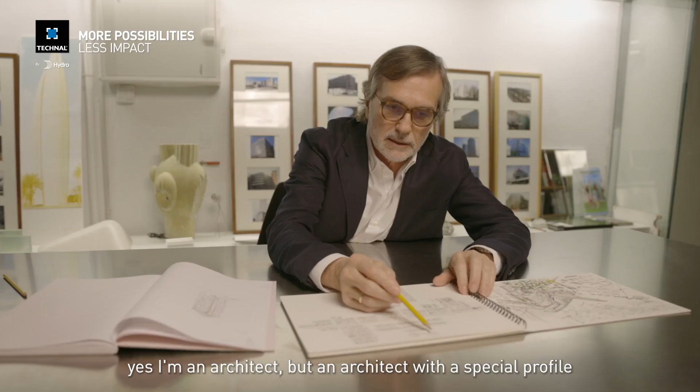First of all, I would like to introduce myself with a simple sentence. Yes, I'm an architect. But an architect with a special profile, because my team and I have developed more than 180 buildings over the last 30 years, making credible the ideas of others, sharing them by teaching in different universities, and especially drawing. We have a small and very dynamic office based in Barcelona, from where we offer facade consultancy for the best architects around the world, especially with Pritzker Prize.

Usually, architects imagine the result and the engineers create the process, or explaining it in another way, architects think what and engineers know how. So we, as facade consultants, move in an equidistant position between both, and our projects are developed with a simple philosophy. Technique and form are the same.

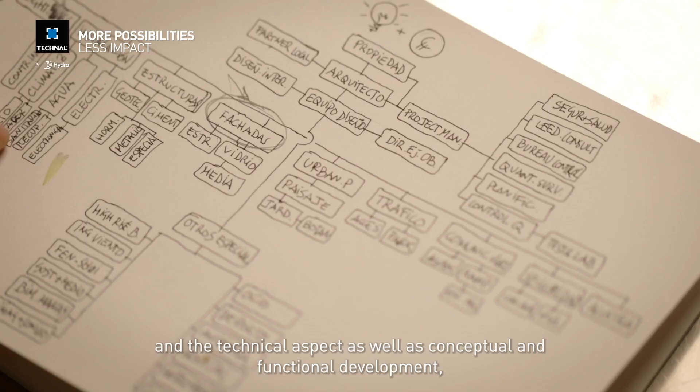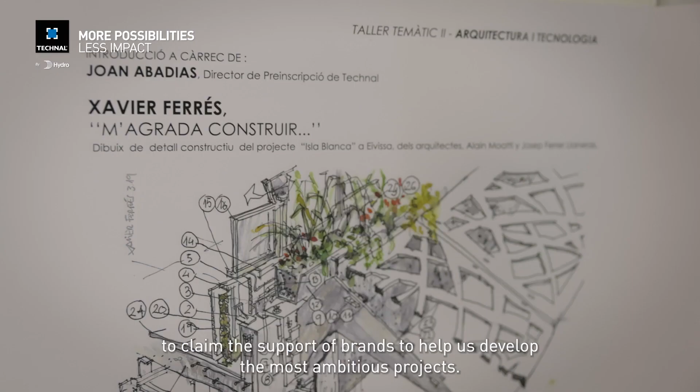Every day, more and more architecture studios focus their work on the level of definition of the facade, the technical aspect and the conceptual and functional development, leaving the detailing and the specific elements of the facade delegated to the technical specialists from the industry. So, the most common way to face the problem of the technology is to claim the support of brands that help us to develop the most ambitious projects. Our role as consultant, in addition to the above, is to think and advise from the strategic development.

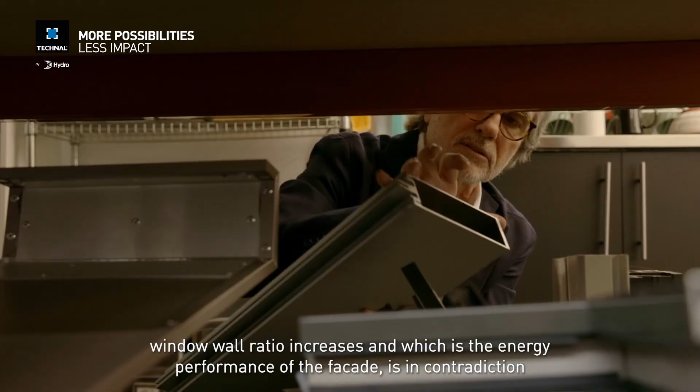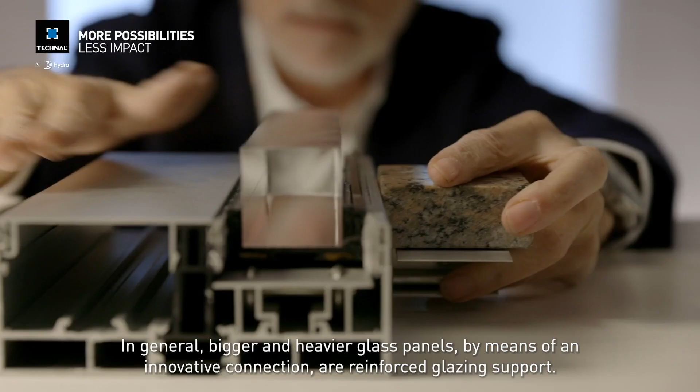The present leads us to consider energy as one of the engines of evolution, and this has been the case for decades. However, this contrasts with the need to work with large formats and glazed surfaces that make the so-called window-wall ratio increase, which is the energy performance of the facade, in contradiction with the dimension of the transparent areas of the buildings. On the other hand, this need to increase the sizes requires larger panel dimensions, engineered for bigger and heavier glass panels by means of innovative connections and reinforced glazing support.

Last year, we started with a jumbo glass of 3.2 by 6.2. Actually, we have, with different suppliers, glasses of 18 meters height by 3.4. So, obviously, we can use these sizes of glass.

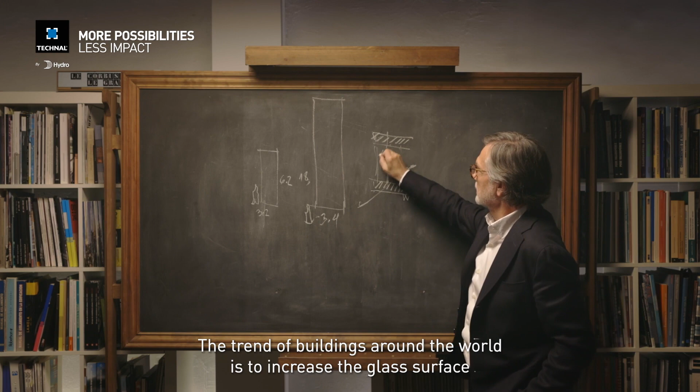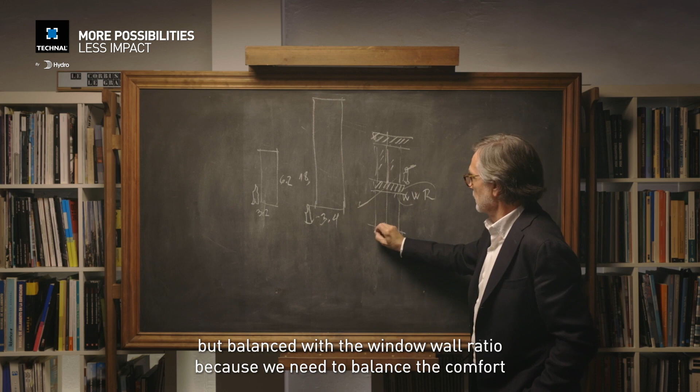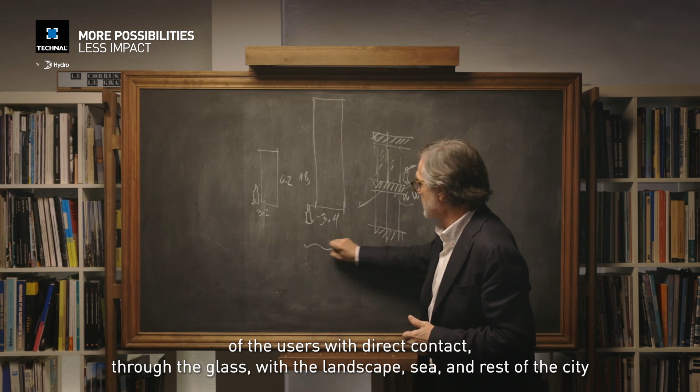The trend of the buildings around the world is to increase the glass surface, but balancing with the window-wall ratio, because we need to balance the comfort of the users, contacting directly across the glass with the landscape, the sea, the rest of the city, in order to respect the rules and regulations in terms of energy savings.

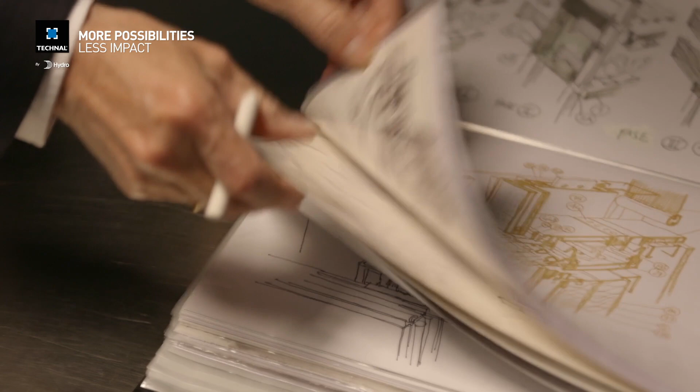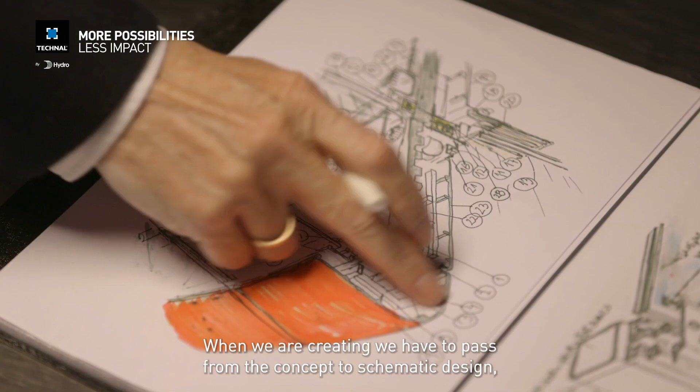The only way that I can explain my experience, my thought, my feeling about the technical decisions, the technical elements, is drawing. My brain is connected with my hand directly. When we are creating, we have to pass from the concept and schematic design development to construction documents, trying to be proactive with the architects, usually our clients, in order to achieve the maximal fidelity to the original idea.

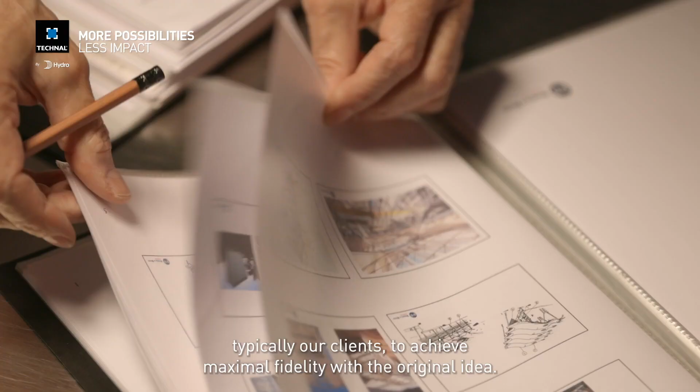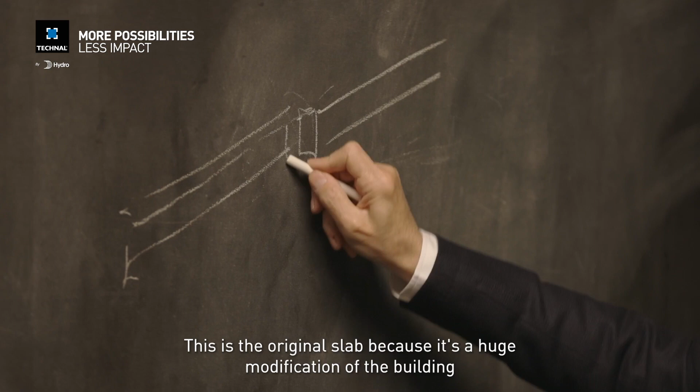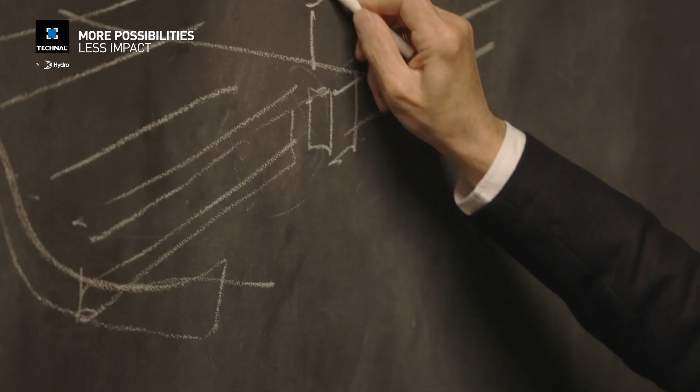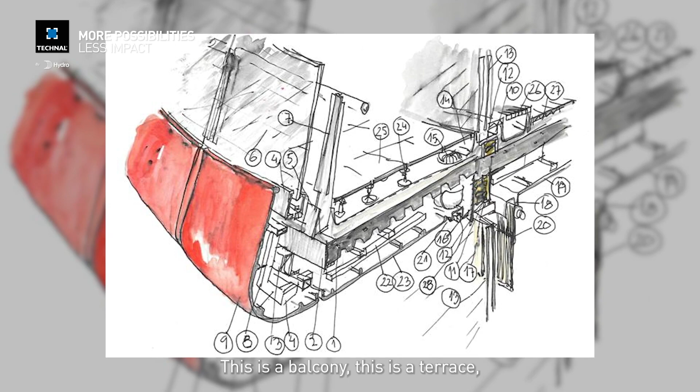For example, a building under construction in Barcelona, named Diagonal Zero Zero, a multi-story building. I think it's 27 levels with a special balcony. This is the original slab, because it's a huge modification of the building. This is the slab. This is the beam that we have to support. The level of the interior floor. This is the exterior floor, and we have a shape like this. This is a balcony, this is a terrace. The building is something like this.

It's more or less 110 meters, and all these balconies are here. And here, in the lateral facade, we have a typical curtain wall. It's a typical profile with spandrel and glass and windows, etc.

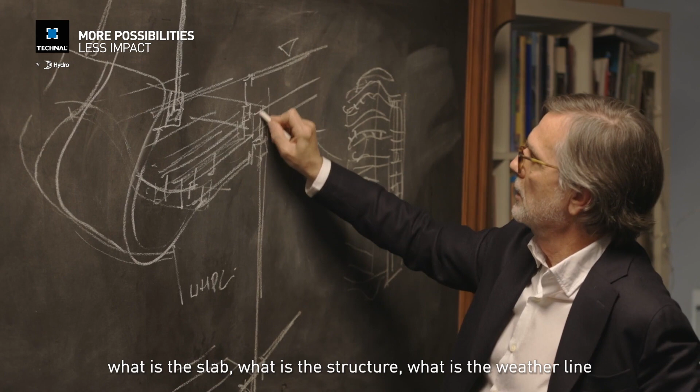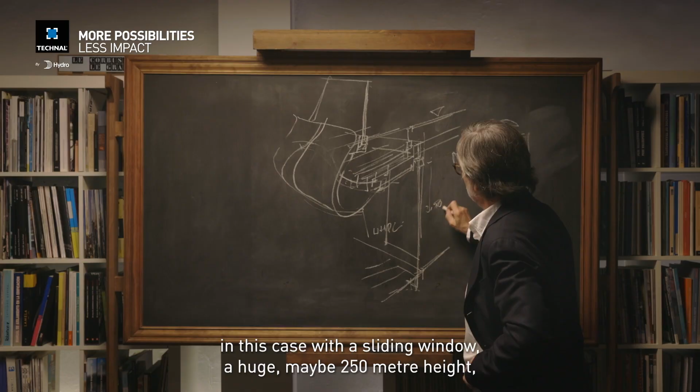The pass from here to here is very important to understand what happened. What is the slab? What is the structure? What is the weather line? In this case, with a sliding corridor, a sliding window, a huge, maybe 250 meter height, and this is a part, and we'd like to show this in color, but I think that it's clear in order to understand what happens when we have to develop from the concept to the detail.

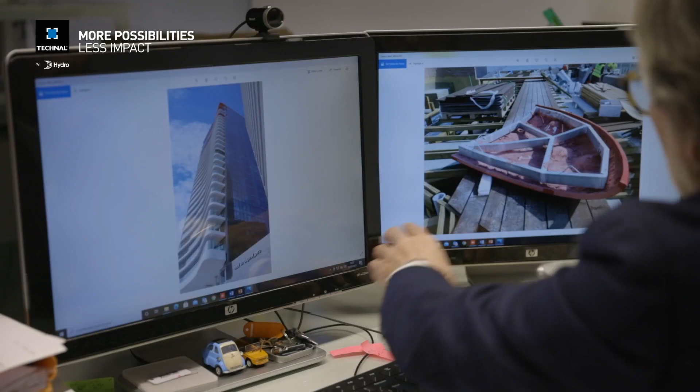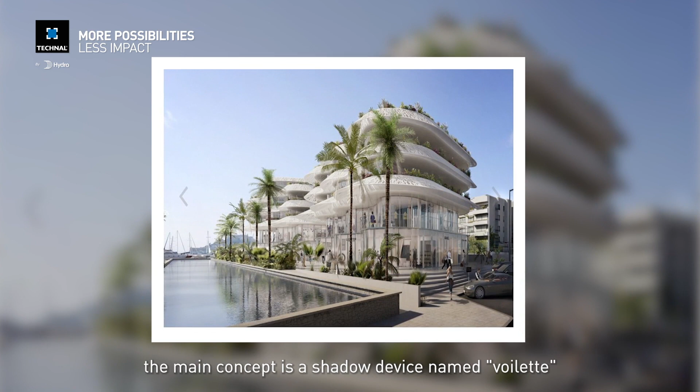The second case that I would like to share with you is a commercial and residential building in Ibiza, named Isla Blanca. The author is l'agence Moatti-Rivière de Paris. The project is led by Alain Moatti, and the local partner is Josep Ferrer Llaneras. The main concept is a shadow device named voilette in français. It's an element qui vole.

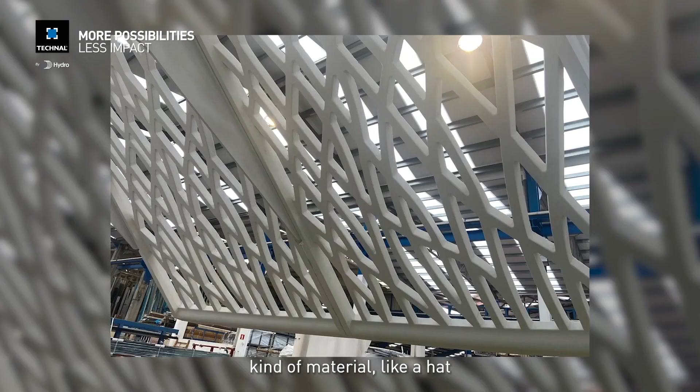So the building is double like this, maybe 80 meters of length from here to here. To use this kind of material like a hat that produces the shadow under the face of a woman on the beach. And this element is something like this. You have different molds because this is the main structure of the building, and here is hanged a huge element like this that supports these curves. So we have the structural element.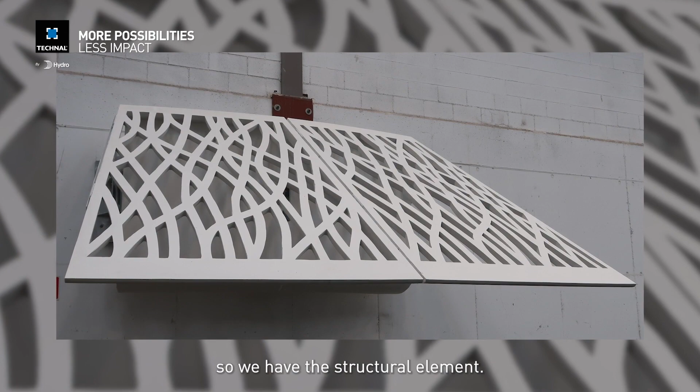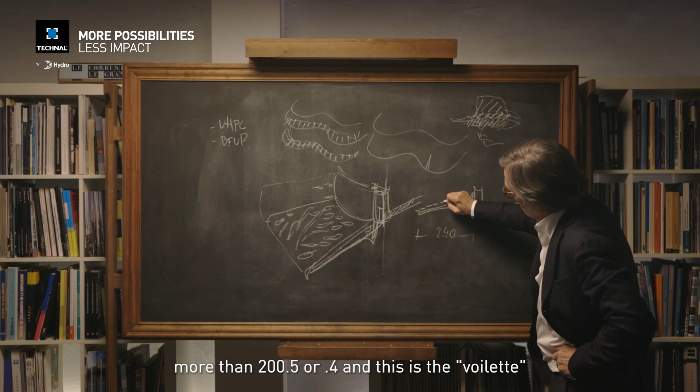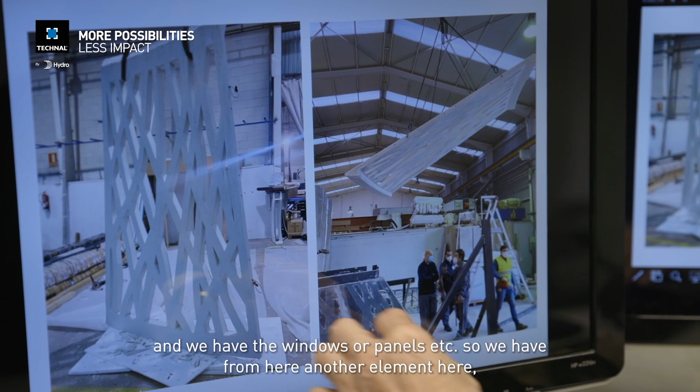This is a cantilever, more than 2.40, and this is the voilette in ultra high performance concrete that allows it to work perfectly like a shadow device. So we have the vegetal elements here, and we have the windows, openables, etc. So from here, we have as well another element here. That is the characteristic of this building.

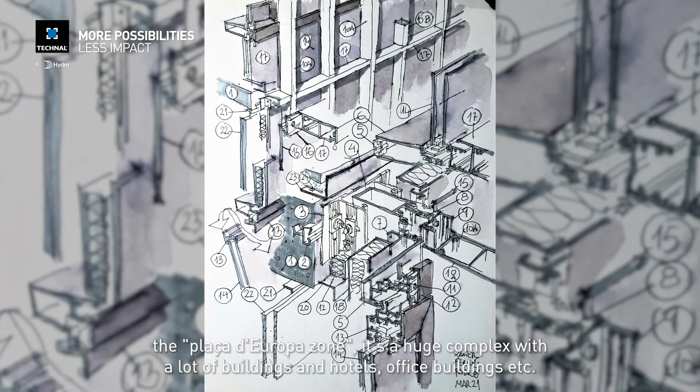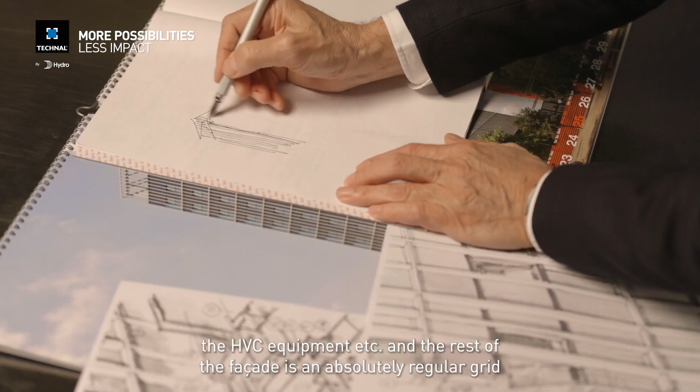The third case study is a multi-story hotel in L'Hospitalet, near Barcelona, in the Plaça d'Europa zone. It's a huge complex with a lot of buildings, hotels, office buildings, etc. This case is a project of Alonso y Balaguer. It's the most common and typical curtain wall facade. The building is a parallelogram like this, with a typical zone with machines and the HVAC equipment, etc. And the rest of the facade is a grid, absolutely regular,

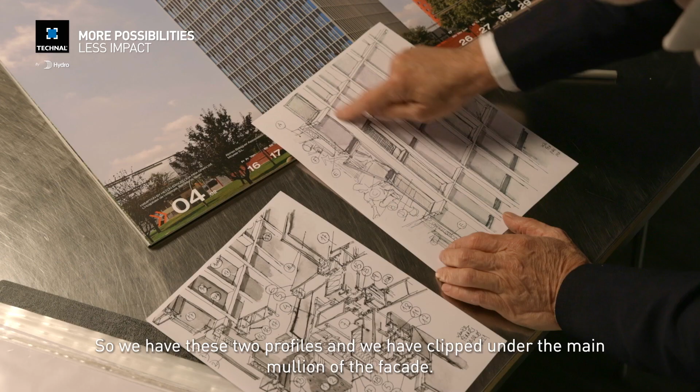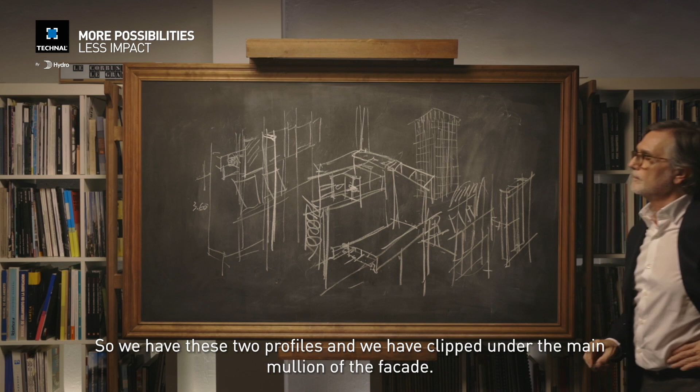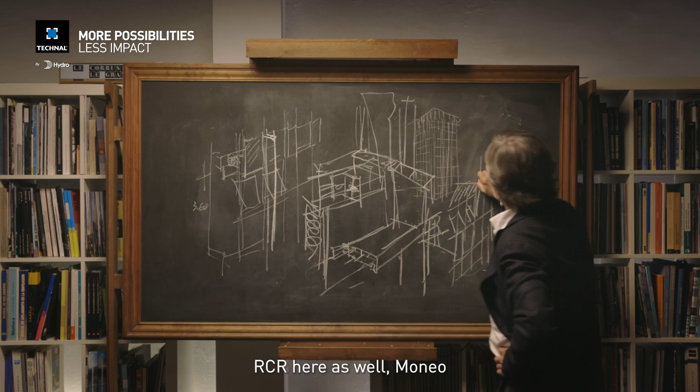with the profiles that I will explain, because in terms of technology it's very simple, but the effect is really very interesting. So we have these two profiles, and they are clipped in the main mullion of the facade, and that's it. So here we have the Toyo building, the Nouvel building, RCR here as well, Moneo, and it is a very interesting complex that I invite you to visit, because if you are a passionate architect, I think that could be a good option to spend one day in order to know directly all this kind of different architecture.

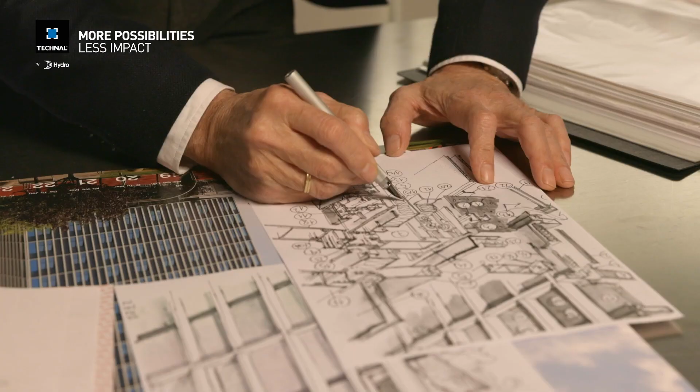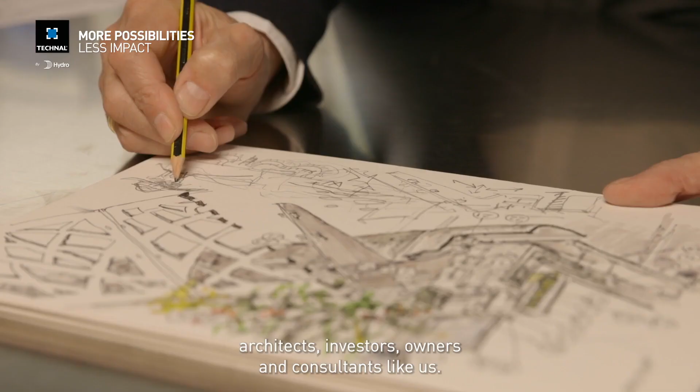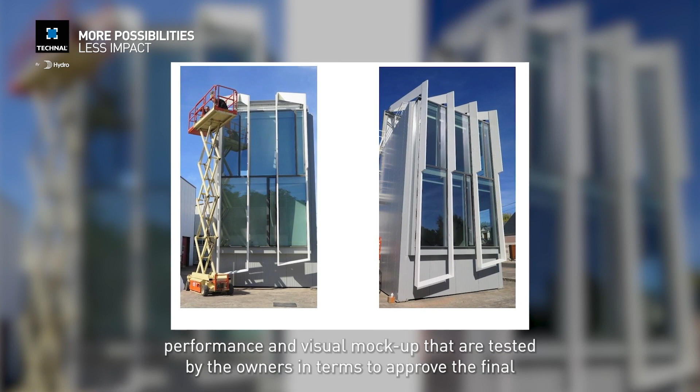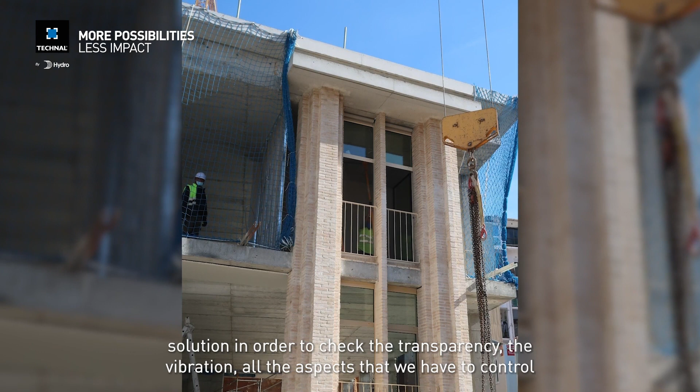As conclusion, I would like to share with you 5 thoughts as a summary. First of all, evolution that improves considering aspects from different points of view, like industry, architects, investors, owners, and consultants like us. Second, the extreme conditions of use are solved anticipating the problems and building samples and performance and visual mock-ups that are tested by the owners to approve the final solution, in order to check the transparency, the vibration, all the aspects that we have to control by using prototypes and mock-ups in real size.

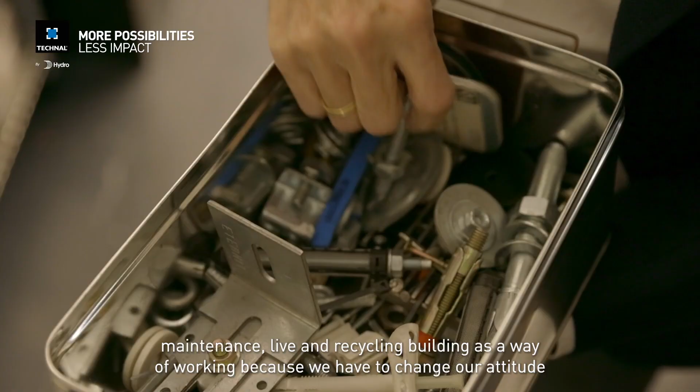Third, we have to look for collaboration with international brands that belong to a big and well-known group. It is the best option to guarantee a long experience of success. The fourth topic that I think is important to sum up this small explanation is to involve the clients and users in the project. Planning, commissioning, exploitation, maintenance, live and recycling building as a way of working, because we have to change our attitude about the design and use of the buildings.

And finally, we have to work from a global perspective, making it essential to combine the most diverse languages, cultures, rules and regulations, economic and social criteria with the most attractive architectural proposals. And for us, it's a privilege to be able to create a space for the better future.

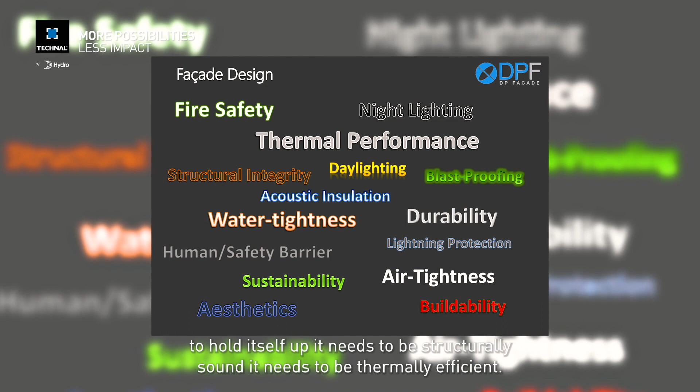We also need to think as an engineer, because it needs to hold itself up, it needs to be structurally sound, it needs to be thermally efficient. There's a whole bunch of engineering considerations that go into creating the perfect facade. We also then need to think like the fabricator, the person who's actually going to implement this. It needs to be something that can be fabricated easily, installed easily, that can be transported. So you really need to wear different hats and think like a bunch of different people.

This is why the teams of facade consultants that work with me come from different backgrounds, different training. Some are architects, some are engineers, some are specialists in construction. There's really different profiles that need to come together to make it really happen.

So far, over the past 20-odd years, I've worked on buildings that were low-rise but highly complicated mega projects like the Dubai Mall or Resorts World at Sentosa and Universal Studios. Low-rise doesn't mean easy. It's generally actually more complicated because you work with multiple systems, multiple materials, from glass to aluminum to steel, which are very classic facade materials. But then you also throw in stone, GRC, GRP, ceramics, and really a plethora of other materials and other systems that complicate matters beyond recognition.

Working on high-rise, the challenges can be quite different because the facade is more repetitive. You repeat it on multiple floors, but it doesn't mean that it's easy either. Other considerations come into play, like building movement; tolerances over super high-rise buildings can be quite challenging to take into account in our designs. Different projects, different locations, different considerations come into play, whether it's seismic activity, snow loading in temperate countries, or extreme heat.

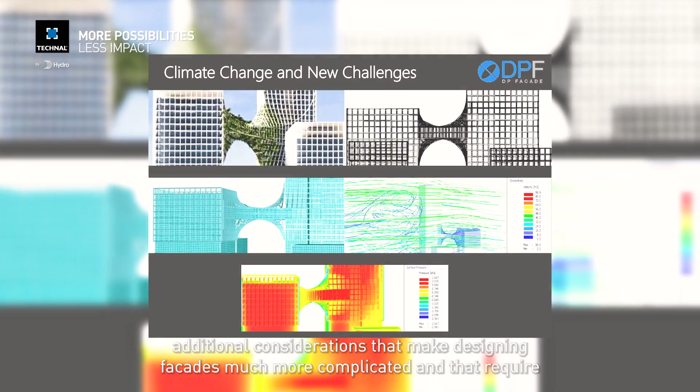This is really one aspect I wanted to touch on briefly now, which is what's happening with climate change. With climate change, what we're having now is more extreme weather, greater winds, greater temperature fluctuations, a whole bunch of additional considerations that make designing facades much more complicated and that require much greater care from the facade consultant who's handling the facade.

On top of that, to make matters worse in a way, or maybe to make matters more interesting, that's how I'd like to think about it, architects are designing facades that are increasingly complex. It's almost like a competition, who's going to get the ideas that outdo the predecessor, so to speak. And we get complex geometries, various aspects in the design of facades that really challenge us to bring our best when we work on these projects.

To do this, we've had to develop or acquire a bunch of new tools that we did not traditionally use. When I started as a young facade engineer, I used to do everything by hand, whether it's the sketches or the calculations, everything was done by hand. And today we are using technologies such as BIM, parametric design, dedicated engineering software. We make use of 3D rapid prototyping to test ideas, to see, does it even make sense? Is it buildable?

We've even developed tools that are not on the market, something we call IVMU, which is an interactive visual mock-up, which allows the designers, the engineers, the architects, the owners, the building developers, to use virtual reality goggles to visualize in real time what their buildings and facades are going to look like, and to make changes in real time. This is really a fantastic tool that we've developed over the past couple of years, and that really changes our approach to designing facades, especially on these complicated buildings with multiple materials and complex geometries.

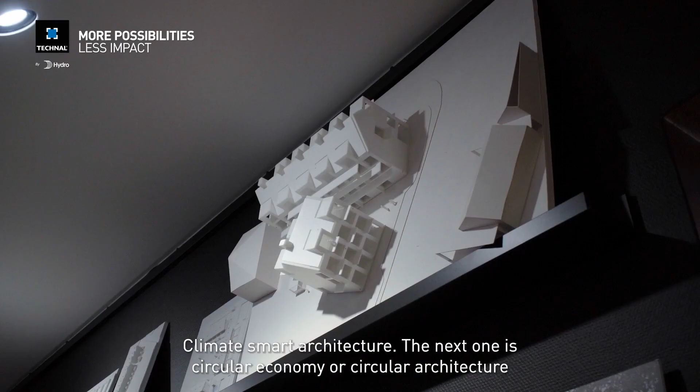The next one is circular economy or circular architecture. And then we work focused with biodiversity. On the social sustainability side, we work with safe environments, health and well-being, and then placemaking. So if we start with

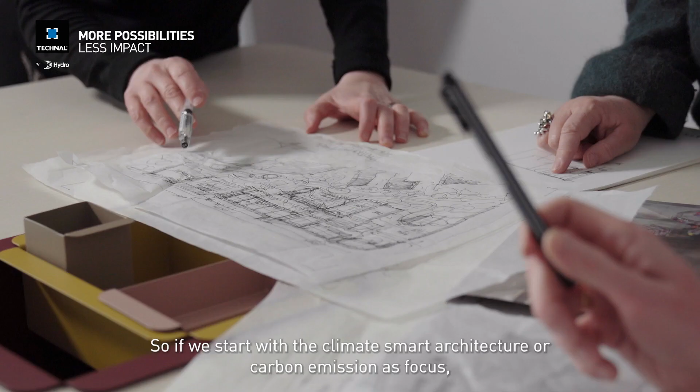climate smart architecture or carbon emission as focus, we work very much on designing buildings with a low carbon emission or a carbon footprint. And that is both from operations when it comes to energy efficiency, but also when it comes to embodied carbon, which means the carbon that is emitted when producing the materials that goes into a building.

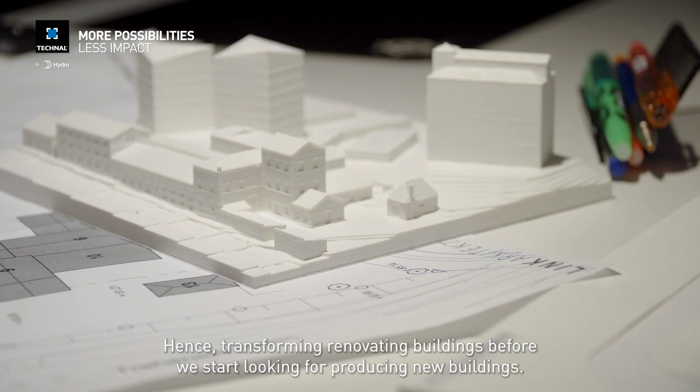If we then talk about circular economy and circular architecture, it's very much about designing resource efficient, securing that we don't use resources unnecessarily, but also about taking care of the buildings that are already built. So transforming or renovating buildings before we start looking for producing new buildings.

It's also about reuse and recycle of materials, and also designing for circularity, preparing our buildings for a future that is more circular than it is today.

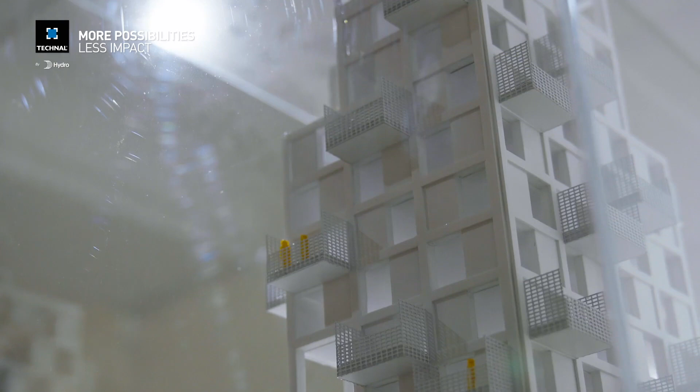And then we can talk a little bit about biodiversity. We know that the built environment and producing materials and constructing the buildings have a great negative impact on biodiversity. So when working with the built environment, it's really important to look at biodiversity and see how we, when we construct our buildings, can choose materials that have a low impact on biodiversity, and also work with biodiversity when we create the environments, the built environments within the cities.

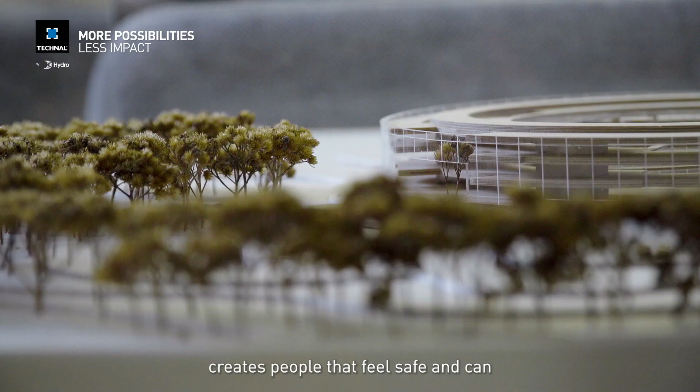If we then talk a little bit about the social sustainability that we work with, one of the areas are safe environments. We know that creating safety within, for example, residential areas, schools, housing, etc., creates people that feel safe and, for example in schools, can take in their education better. They come to school. I mean, not being safe at school can make students not come to school. So safety is a very important part of our contribution to social sustainability.

And then we can talk a little about the health and well-being. That is an important part if you work with offices, hospitals, schools, also residential areas. If you can support a living that is healthy and supports well-being, then you can solve or contribute positively to some societal challenges. We know stress is an area in at least the Western world that is problematic. We know the different heart diseases and so on.

And then the last one is about placemaking, and that is both about safe environment, but also about interesting environment, places where you want to stay, places where diverse people can come and meet, and you can feel the inclusiveness because you want to stay there, you want to meet other people.

When it comes to the architect's role in relation to sustainability and sustainable development, we play an important role because we usually get in pretty early in the processes and the project development, and thereby we can be part of setting a vision that fully integrates sustainability so that it can be a base for decisions made during the design and also during the construction phase.

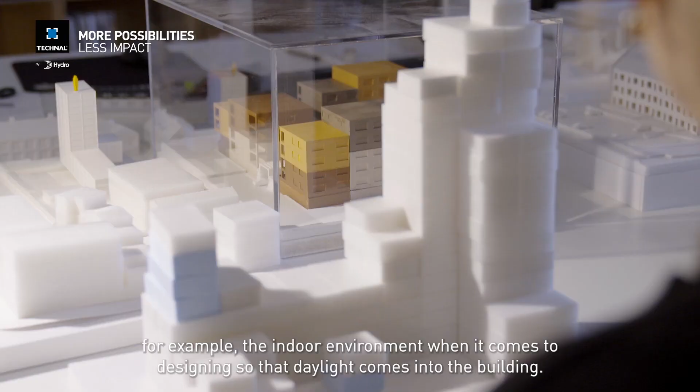And then we also play a very important role when it comes to the actual design. So through the design we can work with, for example, indoor environment when it comes to designing so that daylight comes into the building, that you have a good view of the scenery, and also designing so that we minimize the negative impact of the built environment in relation to resource usage or carbon emission and stuff like that.

And then when we come to looking at choices that we make, for example, in relation to materials, we have a great possibility to influence the final positive impact in relation to sustainability by choosing materials that we know can lower, for example, the carbon emission, the carbon footprint of the building, or add some qualities in relation to indoor environment.

Well, if we talk about materials, we know that the construction industry and producing materials have a great negative impact on the environment. It's everything from polluting the air and the water. It's about using virgin resources that are rare or scarce or limited. So we have to make sure that we don't use them too much, because then we'll run out of them.

We know, for example, that 80% of all drinking water goes into producing different materials. We know that 80% of the loss of biodiversity is coming from producing materials, foods, etc. So it's very important when choosing materials that we look at materials not only from a cost perspective and a quality perspective, but also from a sustainability perspective, and always try to find the materials that give us the most bang for the buck, the most positive impact in relation to the investment that we make.

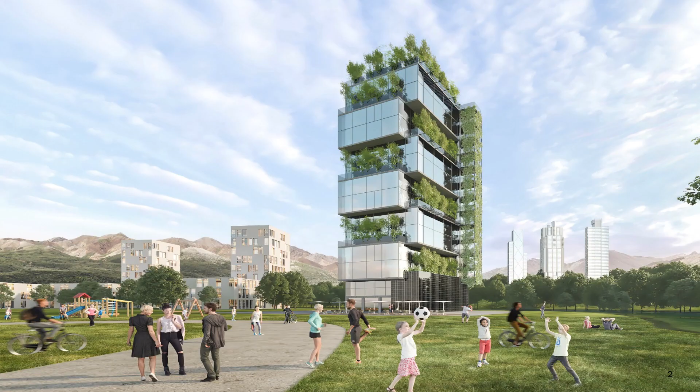Hello, my name is Lee Parker. I am the Group Product Manager for Facades for Technal. During the development of Tentile, we focused on 4 main pillars: innovation, design, comfort, and sustainability. Let's start with looking at number 1, innovation.

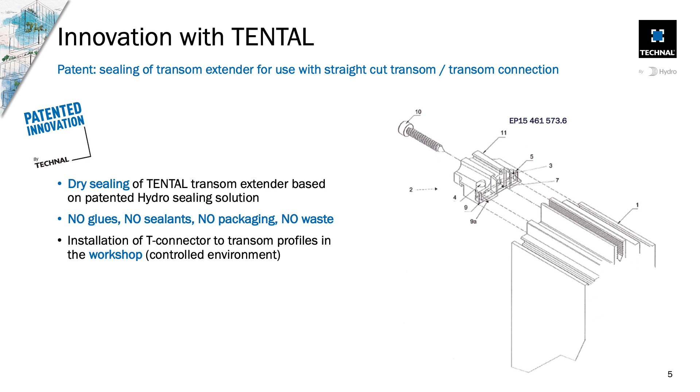So within the development of the TENTAL facade, we've looked to create some new innovations both for our customers and the end user. We've looked to create dry connections between aluminium profiles. We have a patented solution that allows us to create a dry sealing between the aluminium profiles. That means no glues, no sealants, and therefore no packaging and no waste, using a component that's installed in the workshop and therefore not subject to any weather issues. We've also looked to create dry connections between glazing gaskets. Again, no glues, no sealants, no packaging, no waste.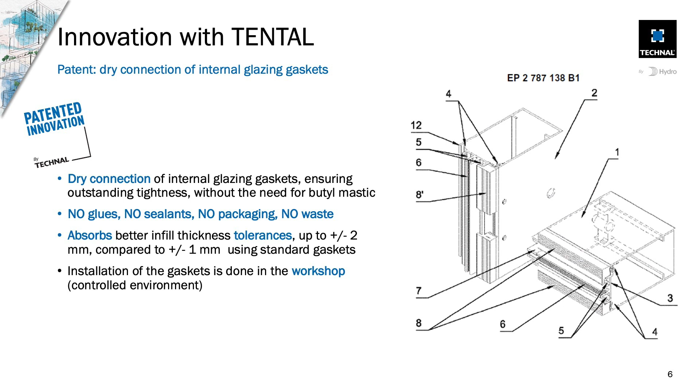And these gaskets can also help to accommodate greater infill thickness tolerances that we experience on multi-layered glazing, such as acoustic laminates or security laminates, and of course triple glazing. We've created a more thermally efficient approach to toggle glazing, preventing the cold bridging from the outside through the glass unit to the inside for outstanding U values.

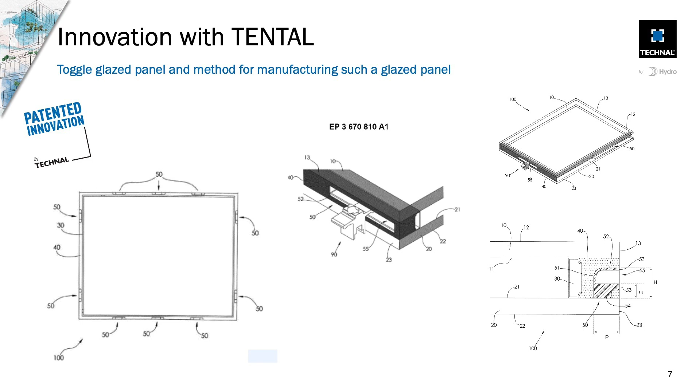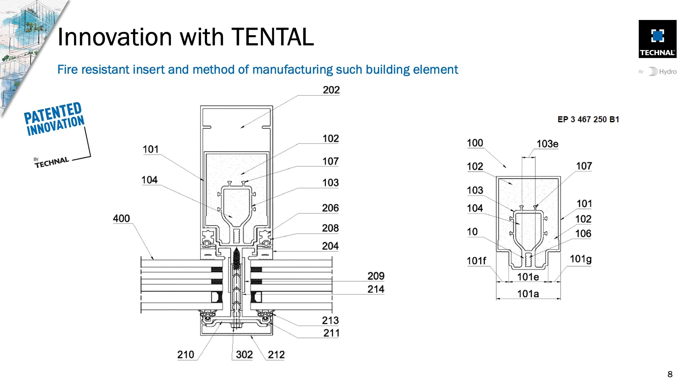We've created a fire-resistant cooling profile that can be inserted into the aluminium, and during the event of a fire it slows down the melting of the main profiles, the transoms and the mullions, allowing the facade to be resistant to fire for durations up to 60 minutes. We've created the possibility to integrate into the connection between transoms and mullions heavy load pins that can bear loads up to 850 kilos in combination with reinforced glazing supports.

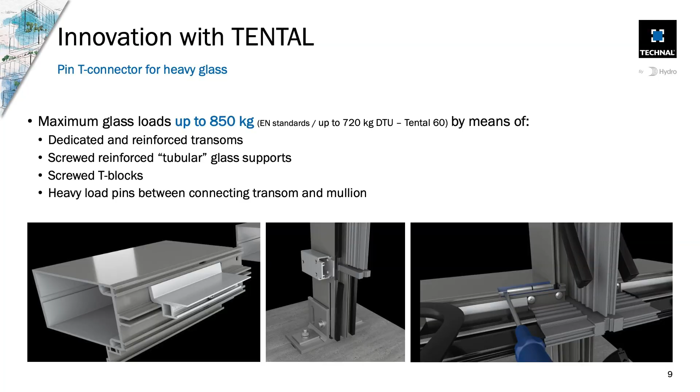Then if we look at number 2, design, the TENTAL facade is available in a number of different aesthetic options. We have feature capped, where the capping profile is on the vertical and the horizontal aspect. We have horizontal line, where we minimize the joint on the vertical line and we emphasize, using extended feature caps, the horizontal line on the transom. We have vertical line, which emphasizes the vertical line on the mullion.

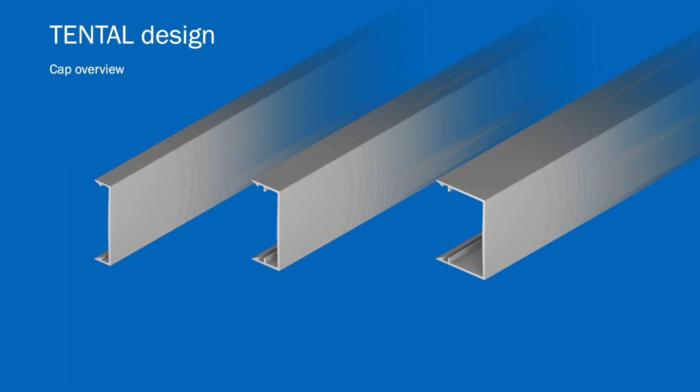We have a low profile flat cap that can be used on both transoms and mullions. We have a traditional structural silicone glaze system, and we also have a beaded glaze system for a picture frame effect from the outside. The feature caps are available in a number of different designs and dimensions.

All profiles can be painted, anodized, or finished with a wood effect. The product can be connected to create different geometries, facets, angles, as well as slope glazing applications. And the product can be applied to both wooden and steel structures.

Number 3 is comfort. As human beings, we spend most of our life indoors. And so we wanted to make sure that we provided a level of comfort to the occupants behind the facade, both physically and mentally. The TENTAL facade has been designed to accommodate very large glazed infills, allowing a lot more natural light into the building.

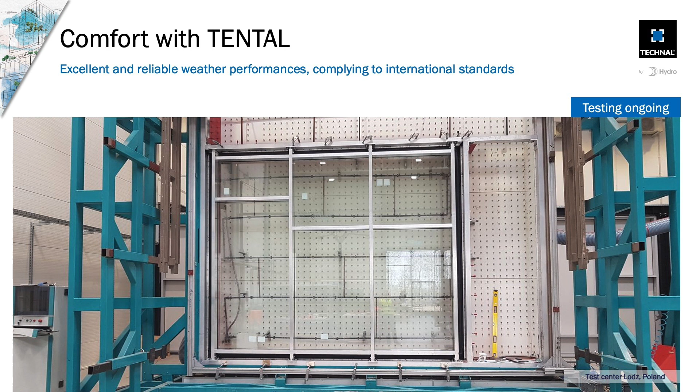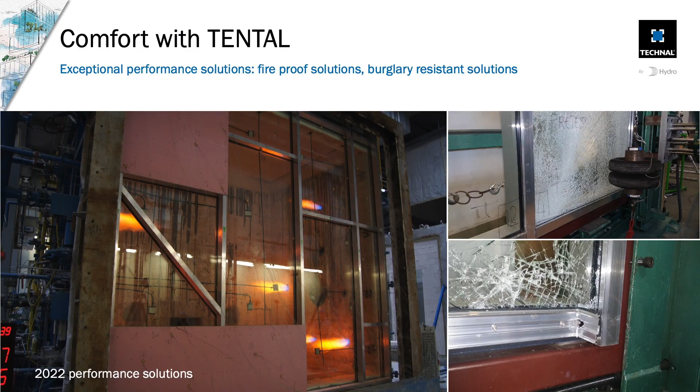The product has been extensively weather tested to international standards to ensure we have outstanding performance and tightness. In addition to weather, we also offer solutions that provide fire resistance and burglary resistance. The TENTAL facade will achieve outstanding thermal performances and will be certified by the Passive House Institute.

It will also be acoustically tested, both for airborne sound transmission through the facade and flanking floor to floor and room to room. The TENTAL facade will incorporate a number of different external attachment options, allowing the seamless integration of solar shading, and will be fully compatible with the next range of windows, doors and sliders by Technal.

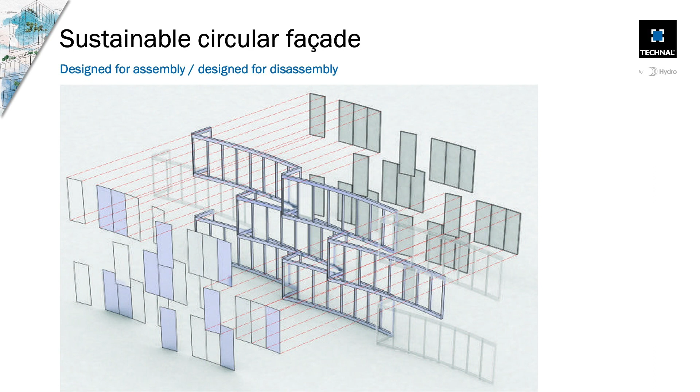And number 4 is the sustainable circular facade. So in the development of TENTAL, we've not only focused on the present, but we've also had one eye on the future. In developing the product, we've focused on production, assembly, installation to make sure it's easy, simple and efficient for our customer. And we've also focused on disassembly when the product is at the end of its life cycle.

This comes back to not using glues and mastics or sealants, because it means that the constituent parts within the facade, the aluminium, the gaskets, the thermal breaks, can be more easily separated, and the materials that can be recycled are segregated more easily.

The TENTAL facade will be extruded using Hydro Circal 75R aluminium, which contains a minimum of 75% post-consumer recycled aluminium content. The impact of this in the facade is significant because aluminium, depending on the fenestration of the facade, can account for up to 90% of the material volume. And so this will mean the energy required to produce the TENTAL facade will have the lowest carbon footprint on the market and will be confirmed by an Environmental Product Declaration or EPD.

As well as aluminium, we've been responsible in the selection of other materials used in the facade, such as thermal breaks produced from recycled PET coming from plastic drinks bottles. The TENTAL facade will be cradle-to-cradle certified. The cradle-to-cradle certification scheme is a globally recognized measure not only of product but sustainability. The assessment of the TENTAL facade is ongoing, but our expectation is to achieve a silver certification.